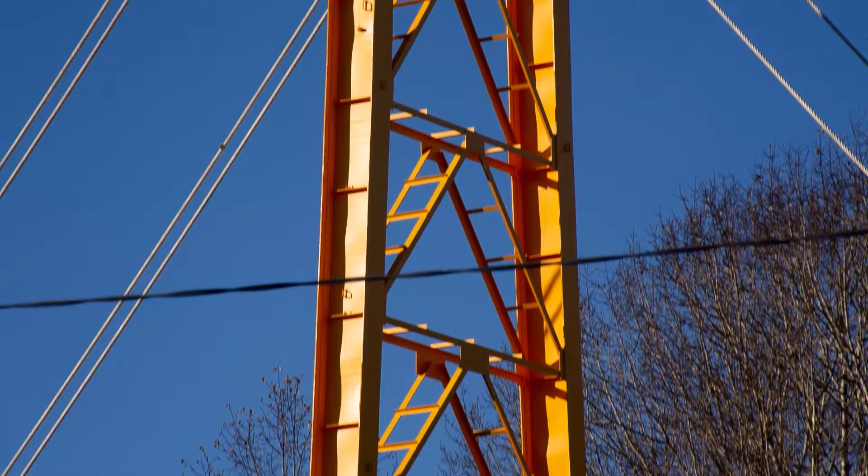People and other creatures fight against it to survive. Sometimes nature rises against us. Its destructive force is fierce, violent, and merciless. You can't predict when it will strike.

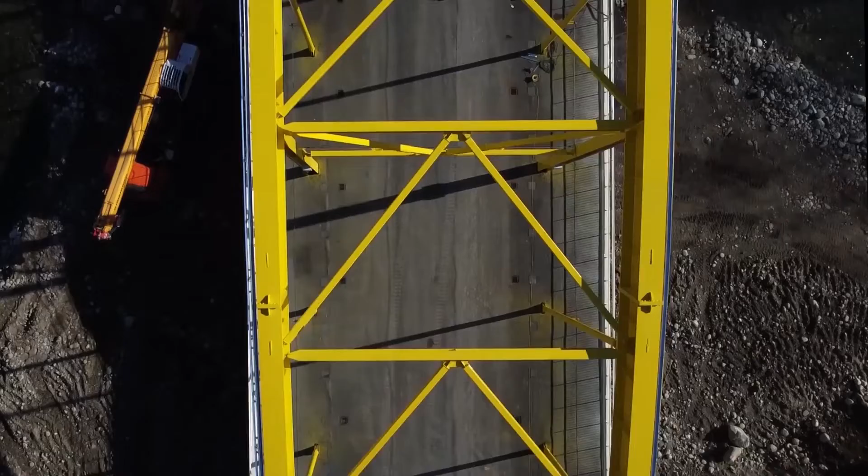Water is one of nature's weapons. A strong current just 15 centimeters deep can knock you off your feet, and a 60 centimeters deep current can carry away an average car.

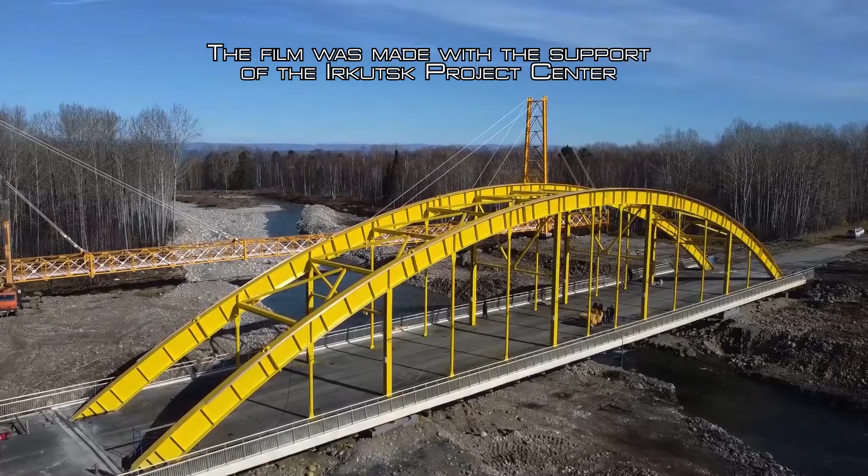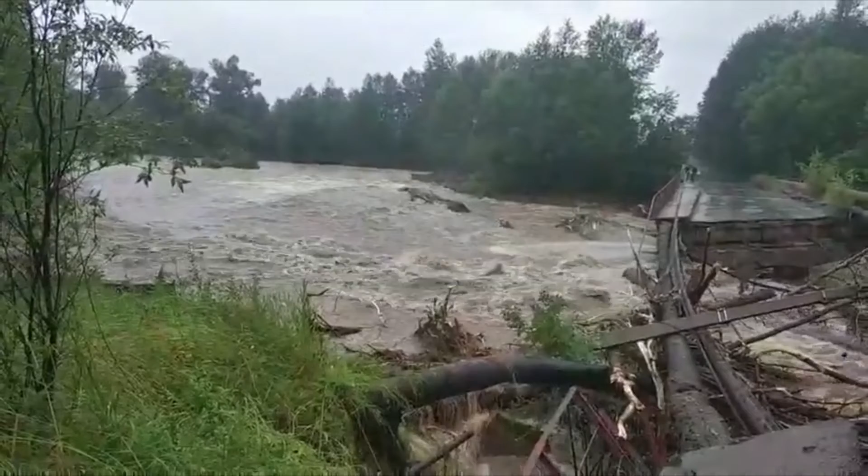In late July 2019, a bridge over the Solzan River in Baikalsk collapsed when the current was rerouted by heavy rains and a stream jam caused by floating debris. Water scoured the bridge abutments, and it couldn't stand under the river's pressure. This collapse threatened to disrupt the heating season, which was scheduled to start in just a month and a half.

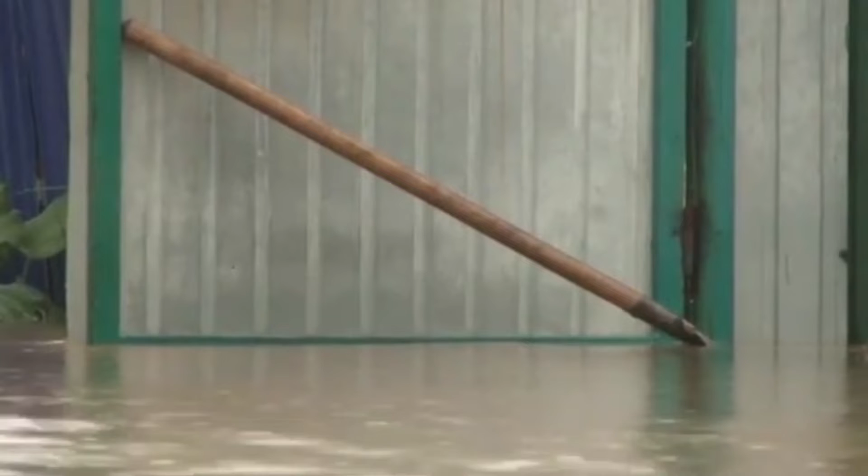The bridge collapsed on July 28th or maybe 29th of 2019, and we were left cut off from the mainland. We had a small crossing, sort of a land bridge under the railroad bridge, but that's it.

I had to go back to Irkutsk in the second half of August to take measurements and inspect the structures. Based on the data, we developed an engineering solution for a temporary overpass where we could lay the utilities.

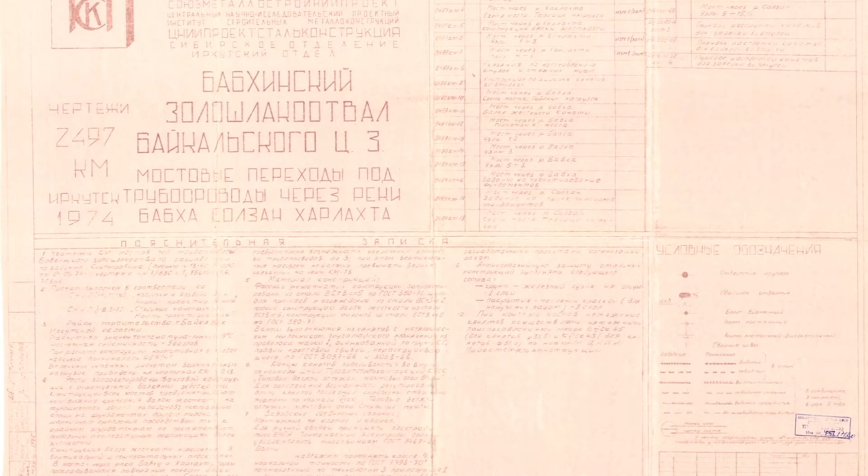The old bridge wasn't properly designed. I don't remember who made the project, but there was no ventilation and a lot of residual elements, chlorine in particular. That led to corrosion of the structures. It was under constant maintenance. 50 to 70% of the clear area was corroded.

And the new bridge was intended for cars and pedestrians. In March 2020, construction organizations started to move infrastructure to the cable-stayed bridge and construct the shore abutment of the motorway bridge.

The Irkutsk design engineering firm worked very fast. The bridge truss project was finished in record time. We built the truss between the collapsed bridge spans, and the heating season was able to start shortly after that.

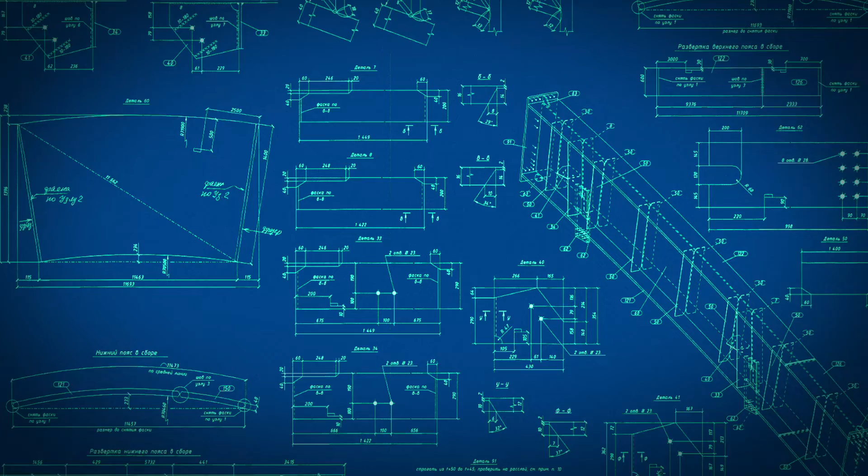The finished bridge project was presented to the mayor within 2 weeks. The technical documentation on design concepts and road transport solutions was developed during the next 2 months. Engineers had to gather all the base data.

The problem with the Solzan River is that narrow ravines create a huge watershed area. For the Solzan River in particular, this area is about 70 square kilometers. It rains a lot during summer on Khamar-Daban. It's important to measure the levels of high water under the bridges over that river.

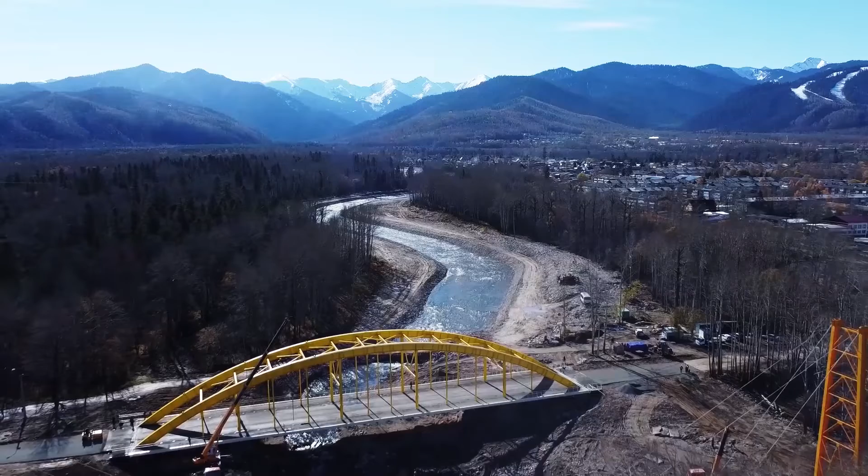Some of the factors were not considered in the process of project design and construction of the old bridge, which led to bridge scour during high water. There were 5 bridge spans, 16 and 8 meters in length. Bottlenecks between the abutments rerouted the current, which led to the bridge scour.

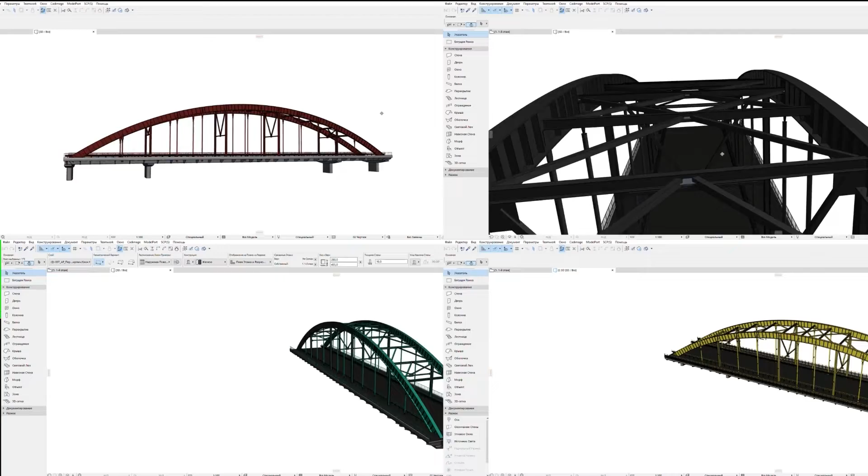The model of the future bridge was conceived and visualized within 3 days. Before construction, a 3D modeling process takes place. Engineers applied seismic loads that can occur in operation, create blueprints, and modernize the structure.

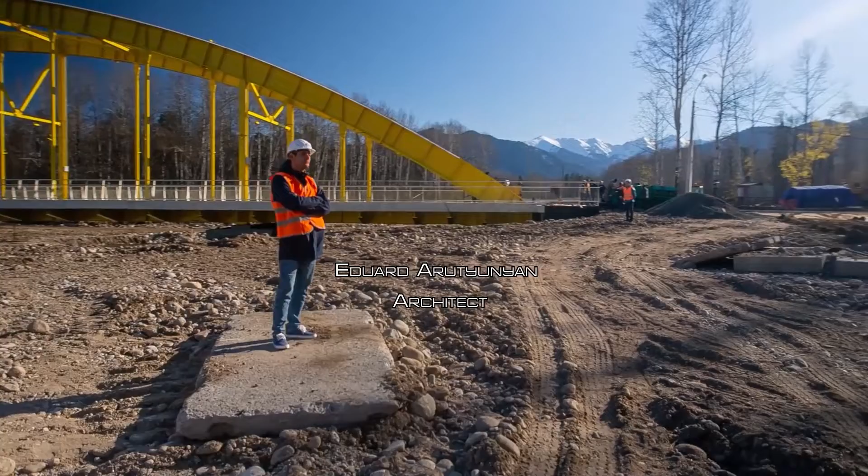We studied similar structures across the world, considered all the engineering aspects, and chose the shape of the bridge. We created a model within a short time frame, and then we had to decide on a color scheme. We chose yellow to make it an eye-catching point of attraction. It is a significant landmark for Baikalsk, so we made it very bright.

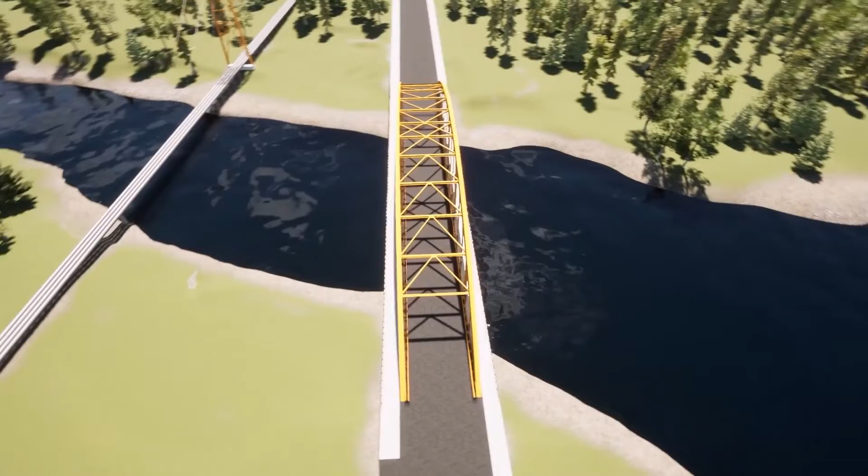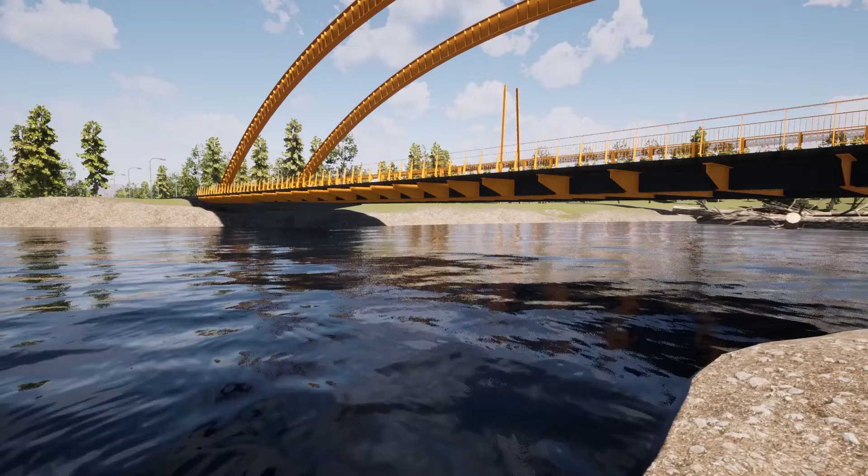In the process of choosing the form of the bridge, we paid a lot of attention to natural factors and the distance between the abutments. If the distance was too small, it would cause new stream jams and new changes in the direction of the current. The new bridge was 3-span with a 50.5 meters wide water passageway. The distance between the abutments on shores and in the waterway was 16.4 meters from each side.

My task was to develop a solution that allows us to cover a 50-meter distance with one span. And the easiest way to do this from the technical standpoint was to use an arch design.

In the end, the bridge was about 100 meters wide, and the water passageway's width was 50 meters. The trees can easily pass by the abutments.

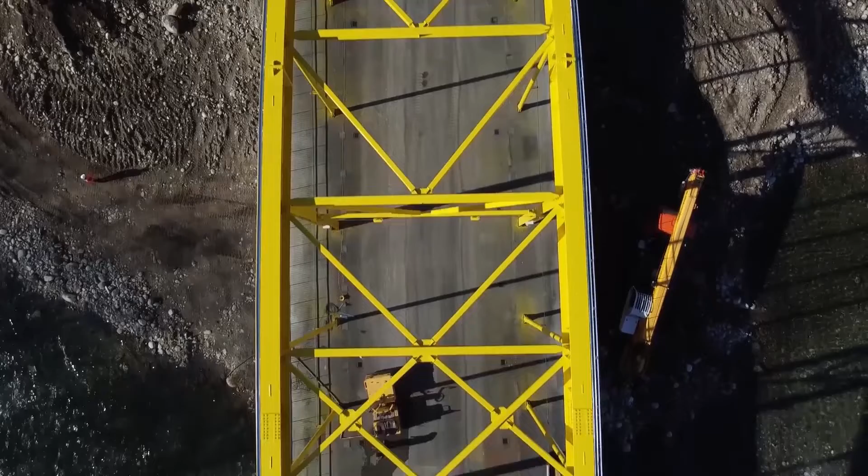We polled the townspeople to choose a name for the bridge. There were a lot of options: factory bridge, pulp maker's bridge, and so on. In the end, we chose a pretty romantic option: the Bridge of Good Hope. It's the place that will fill people with hopes for a great and bright future.

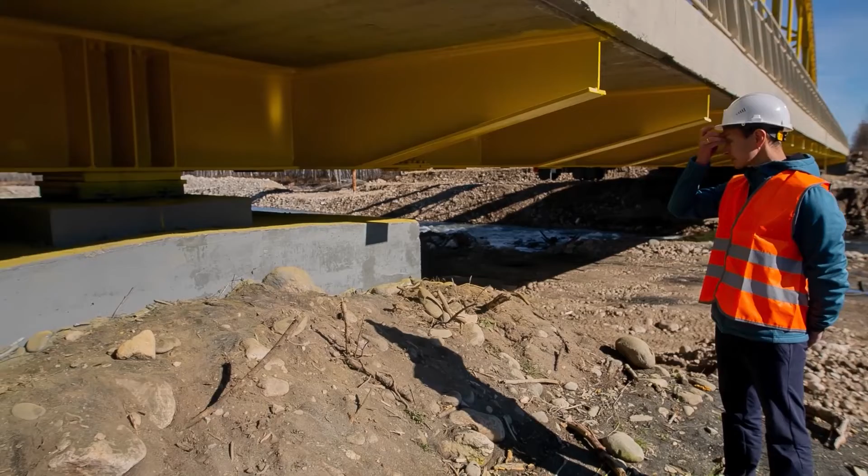We're standing in front of the main waterway abutment, which consists of transverse bracing and expansion bearing on the distributional abutment stone. The bracing is put on 8 pillars that are submerged into the soil for 12 meters. These pillars are 1,200 millimeters in diameter, with mesh reinforcement with deformed section.

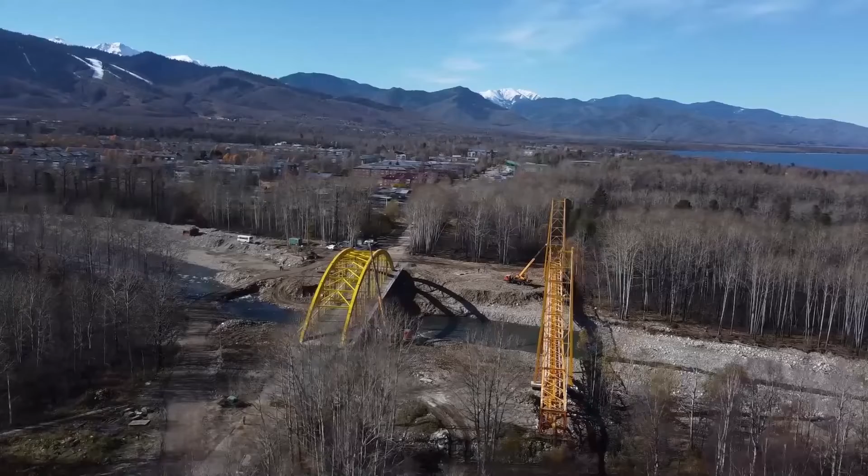As an architect, I tried to make the structure lighter so it would not look like a railway bridge. I think I achieved the goal. We ended up with 2 main arches that are connected with visually light constructs.

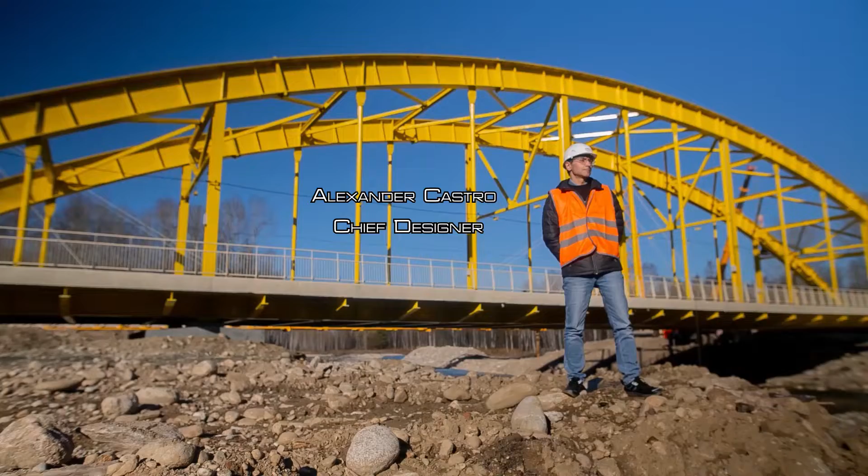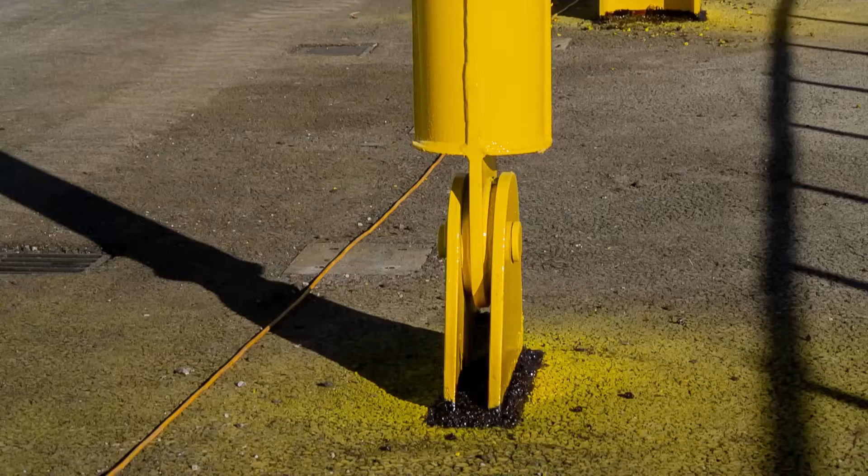The roadway is reinforced in a way that it works in tension, taking a part of the load from the arch in a way. All the calculations showed pretty good results. With double shear joints, these pins have 40% safety margin despite pretty unassuming looks.

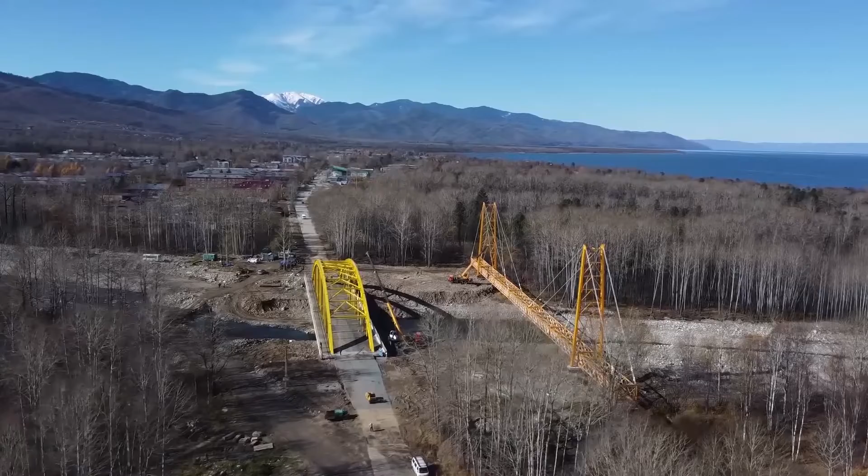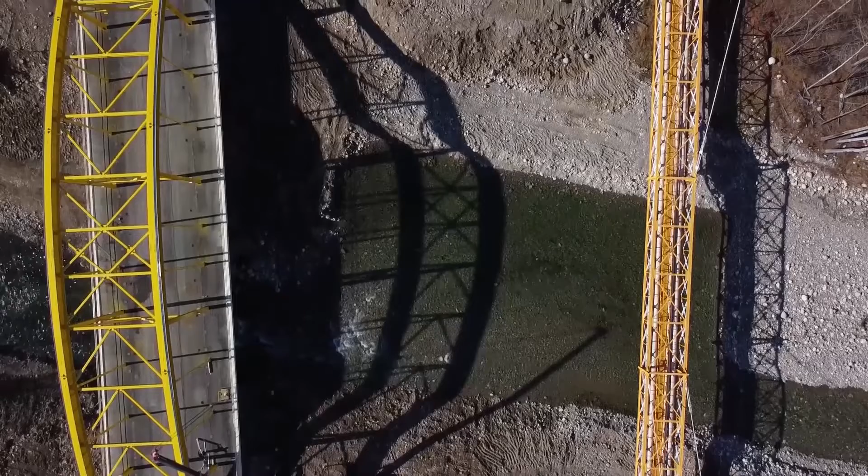A secondary cable-stayed bridge was built near the main motorway one, connected with the roadway via cables. The project for the second bridge was based on the existing cable-stayed overpass structure where the utility infrastructure was placed. We designed a project for utility rerouting.

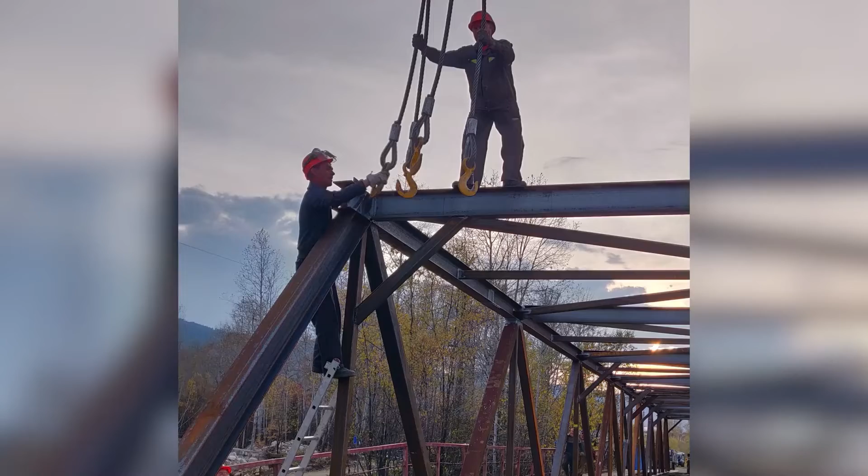This project was implemented between heating seasons, and after all the infrastructure was relocated, we dismantled the structure and started the construction of a permanent bridge.

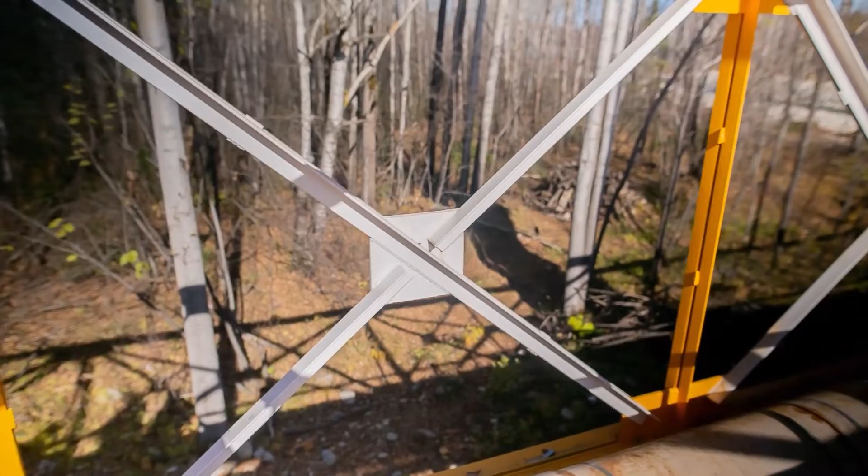The engineering company did a great job. Very well coordinated work. I don't have any complaints whatsoever.

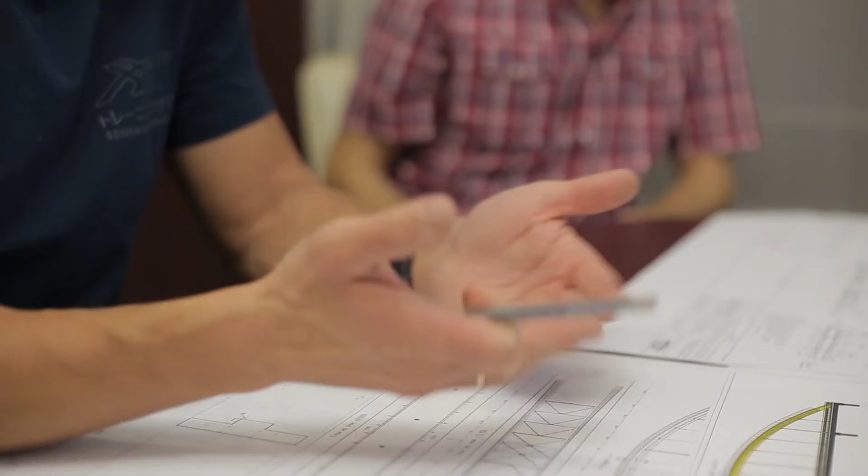We had a lot of requests from the operating organization as well as experts in the town administration, our contractor and our client. There was no problem that we couldn't solve. I think we managed to solve every request and our beloved contractor implemented everything in metal very quickly and competently.

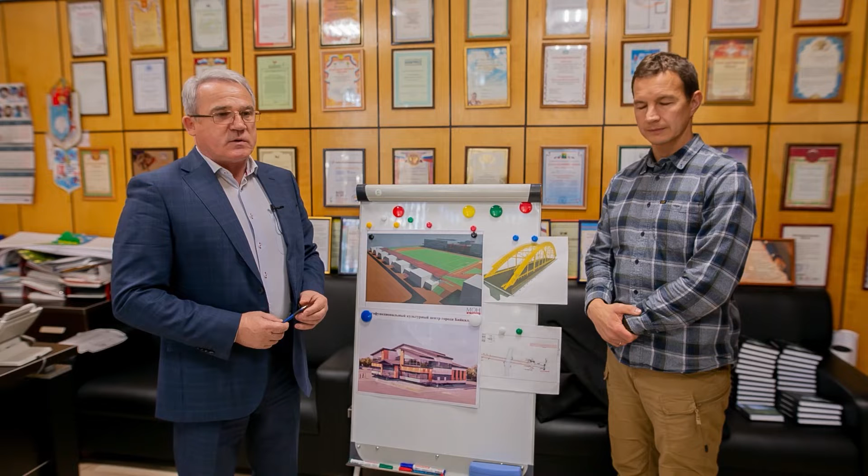When we started to work with Irkutsk design engineering firm with Roman Gennadievich, we understood immediately that he's the man we need, because we got everything we needed in time.

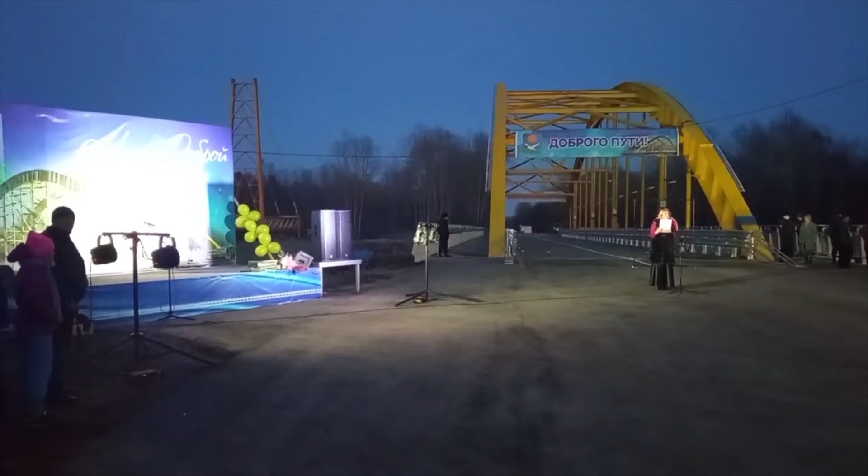Today is a great day for our town. We're unveiling this commemorative plaque with the bridge's name, the Bridge of Good Hope. I want to express my gratitude and appreciation to everyone who made this celebration possible. Thank you all very much.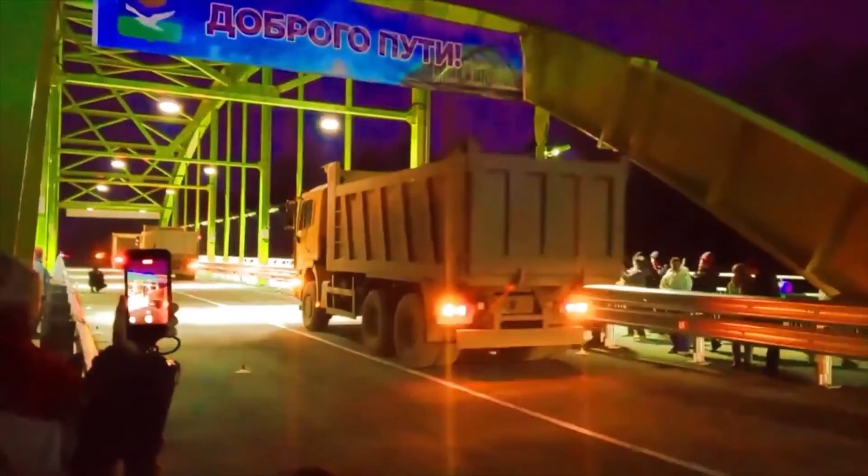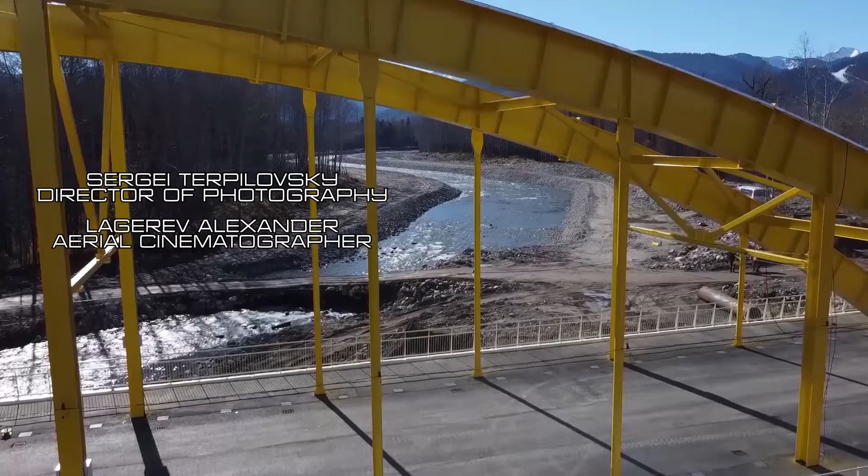Sometimes one part of nature destroys its other parts, even if they support that one part's life. Like a hive that sends swarms to destroy flower fields. The nature's power is immense. Human tries to tame it, but it still comes out on top. It's a unique living organism that brings us surprises again and again. Calm, blissful, unconcerned.